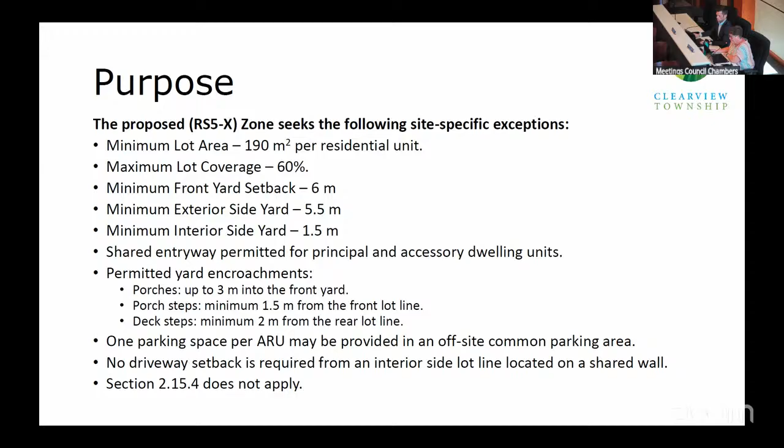Section 2.15.4 does not apply. The effect of the application is to facilitate a concurrent draft plan of subdivision red line revision application, which seeks to reconfigure a portion of the existing draft plan of subdivision.

This would include: 8 townhouse blocks consisting of a total of 54 freehold condominium units, including 35 units with accessory residential units, or ARUs; a common parking block for the ARUs parking area; a new school block shared with the development to the north; and minor changes to the existing lot fabric of the 26 single detached dwelling lots.

The next slides just show the surrounding land uses. The subject lands are shown in the bolded black line. To the north is an existing draft plan residential subdivision, the Clearview Park draft plan. To the east is County Road 7 and agricultural lands. To the south is Highway 26 and the emergency hub building, as well as residential and commercial uses. To the west is Mowat Street North and residential lands. The land subject to the current zoning application is located within the undeveloped portion of the existing Estates of Clearview draft plan of subdivision.

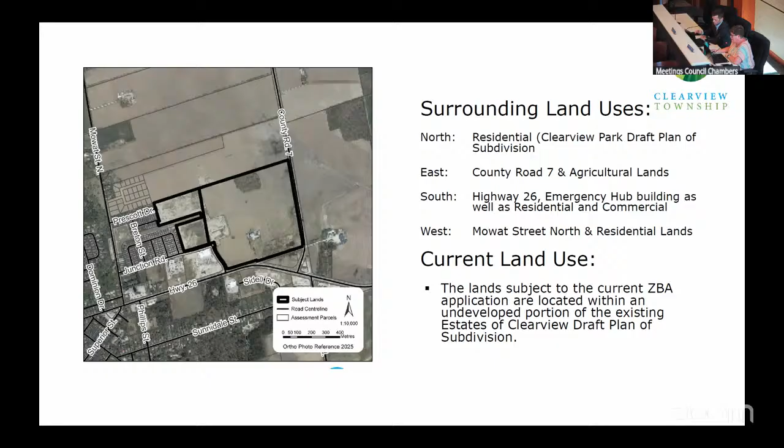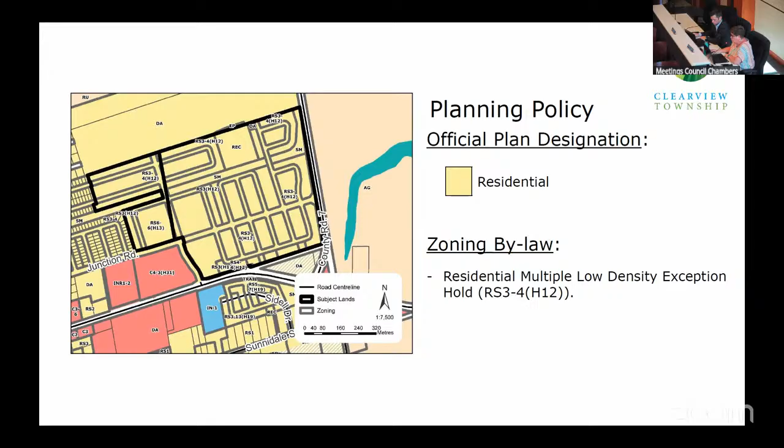Next slide, planning policy. The official plan designation is residential, and the current zoning is Residential Multiple Low Density exception hold, RS3-4, hold 12.

Submission items to support the application included a cover letter, a planning justification report, a draft plan of subdivision redlined, a site servicing concept, a servicing and stormwater management memorandum, redline draft plan, and the redline draft plan transportation review. All of these items have been located on the website for public and anyone to review.

Next slide, notice and circulation. Notice of the subject application was given in accordance with the Planning Act on July 8th, 2026, through mailing and circulating paper notice within 120 meters of the subject lands, as well as posting signage on the property. Details of this application and supporting materials have been made available to the public on the website and circulated to the relevant commenting agencies.

As for public comments, if comments have been received, they were part of the published agenda, and any other comments received after the publishing of this agenda will be included as part of our recommendation report.

Looking at where we are in the process: the applications were received on June 1st of 2026, and deemed complete June 12th of 2026. Notice of the public meeting was given July 8th of 2026. We're here at the public meeting now. There are two other steps remaining, a recommendation report and a notice of decision, which are to be determined at this time.

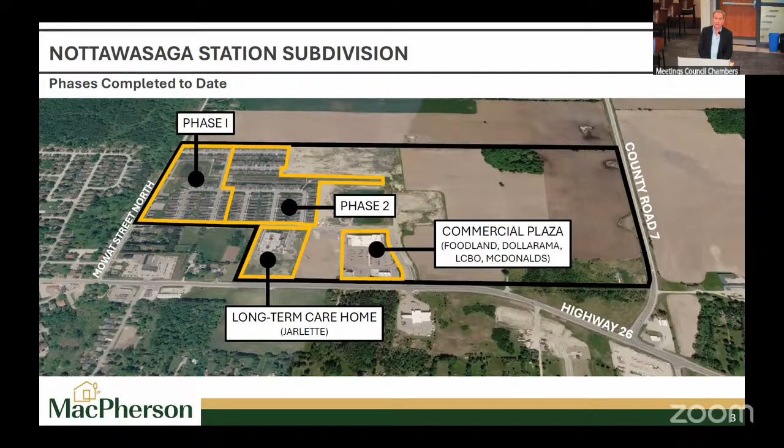Next slide, please. So just to orient you again, the yellow line is our original land holding, and as you saw from the other maps, we've developed about 200 homes on the west side of the site, single-family homes, the Jarlette site which is a long-term care facility, and the new plaza. So phase 1 was about 75 single-family units, phase 2 had 119 single-family units, and Jarlette built their site on our lands, and then we developed the commercial plaza with the Foodland, Dollarama, LCBO, and McDonald's.

Next slide. I'm sure nobody noticed, we recently put traffic lights in out on Highway 26. I proudly used the left turn signal to the arrow going in, grabbed something at McDonald's on the way over here. So those are finally up and running, and everyone's using it as an access.

The works on Mowat Street North have just been started. That's blocked off right now, I went and had a look before I came over. Those are now going to move apace to get at least the northerly 2/3, 3/4 of Mowat Street there brought up to an urban standard. Probably take us the next 3 months, so probably August, September - I think we have an October completion date. So we'll have curbs, sidewalks, asphalt, the whole bit in there, and clean up that part of Mowat Street. Next slide, please.

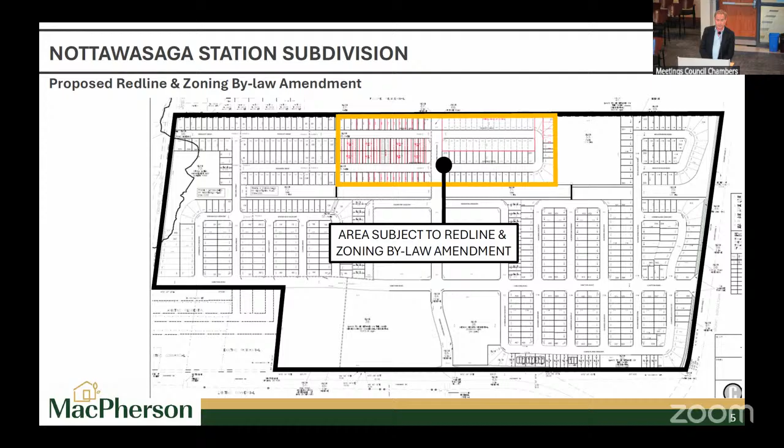This is the area subject of the bylaw, and I'll move to the next slide which gives more detail. This portion shows where the changes are. I'll start on the right-hand side, the school block site. As many members of council and staff are aware, we've been talking to the Public School Board for years, 7-8 years, about locating a new elementary school in the Nottawasaga Station subdivision and adjacent to it. After a lot of back and forth and movement of the block, we finally came into an agreement with the Public School Board on this location.

What you see there is a block of about 1.85 hectares, which is 4.5 acres in my language. There's an additional 1.5 acres plus, I believe, to the north, contiguous to this block. So the entire site is a little over 6 acres. 3/4 of it is on our site, and the remaining quarter is on the landowner to the north's site. What we have here is you can see the underlying lot fabric that we originally had there.

The zoning we've asked for would permit both uses. It would allow the school site, but also maintain the zoning, the ability for the single-family lots. The reason for that is in the event the school board never steps up to buy the site, or has a change of plans or wants to put it somewhere else, it'll allow us to finish this off and build those lots. That is not our hope - we'd like to have the school there. In the case the school is built, you'll have that new configuration of the roads on the right half there.

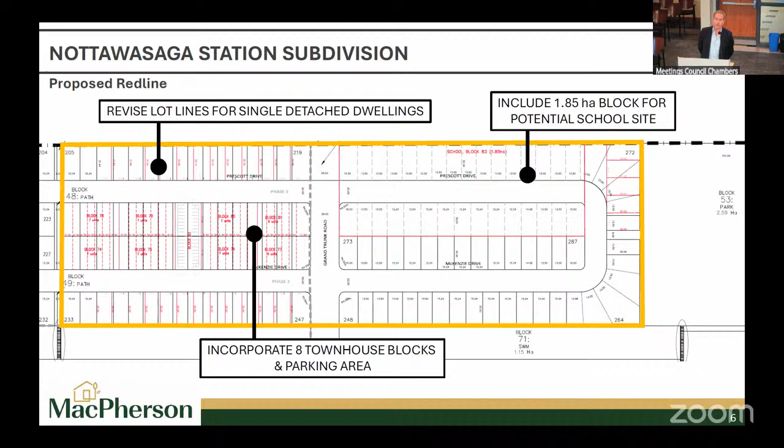And the interesting piece here is the piece in the middle. So if I could go to the next slide. No, not that - that's just a picture of the areas being rezoned. No, sorry, we'll just keep going. One more and one more. And that's been covered by Rosalind, so we'll go here.

So this is the meat of what we're trying to do. I'll explain a bit of the economics on the site and what's happened over the last 4 or 5 years. Through the pandemic, obviously, everything was selling like hotcakes - we had single-family homes in our first 2 phases. After the market topped out in April of '22, the market, as everyone knows, has declined. Prices are down in this area, in this subdivision, about 30% from the peak prices, the peak being April of '22. So a house that would have sold for $950 back at the top of the pandemic is selling for in the low 7s now on the resale market, the ones that our purchasers have chosen to bring to the market.

As a result of what's going on in the economy, all the uncertainty in the world, the rise in interest rates, and the general decline in demand because of a lack of a pandemic, people are finding it difficult to afford homes. We're finding this not just in Stayner and Clearview Township, but across the board. We're building in St. Thomas and other areas too, and it's the exact same story everywhere. People are trying to get down to a price point where they can afford to buy real estate.

In addition, there's an affordability issue for working people's houses. For example, the people who would work in the long-term care center, the McDonald's, the Foodland, it's difficult to achieve even a $700,000 house. It's a lot of money.

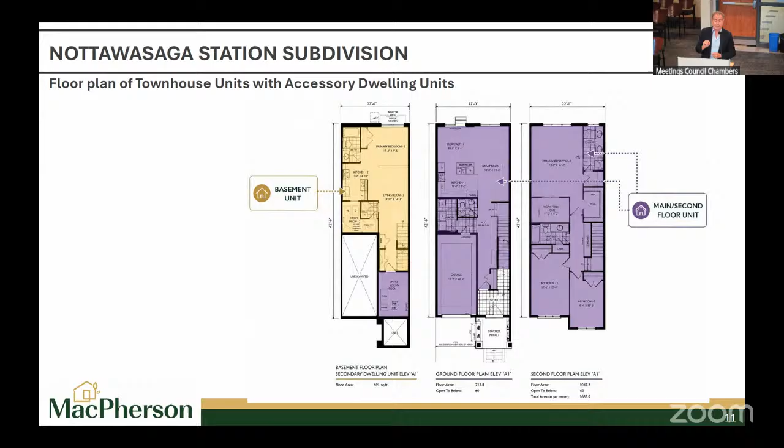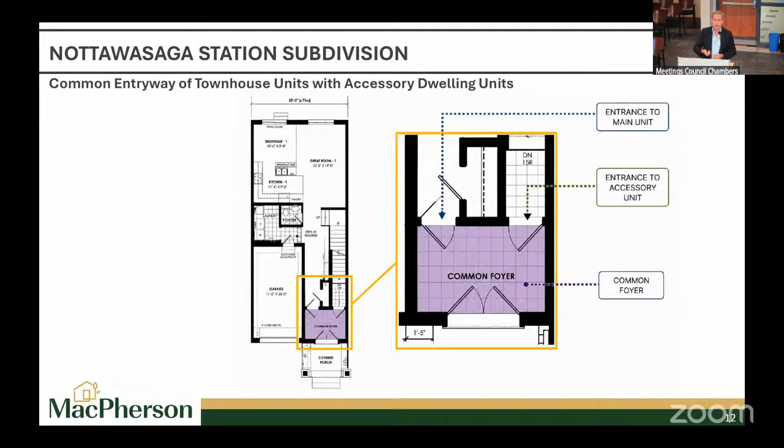So if we could go to the next slide—this is how it works. On the right you see the foyer as you walk into the house, a common foyer right at the front. On the right-hand side there's a door with a landing behind it that goes down the stairs into the ADU. The door on the left-hand side goes into the ground floor of the main unit, and then you're in your house, your main unit. Fairly straightforward. Next slide, please.

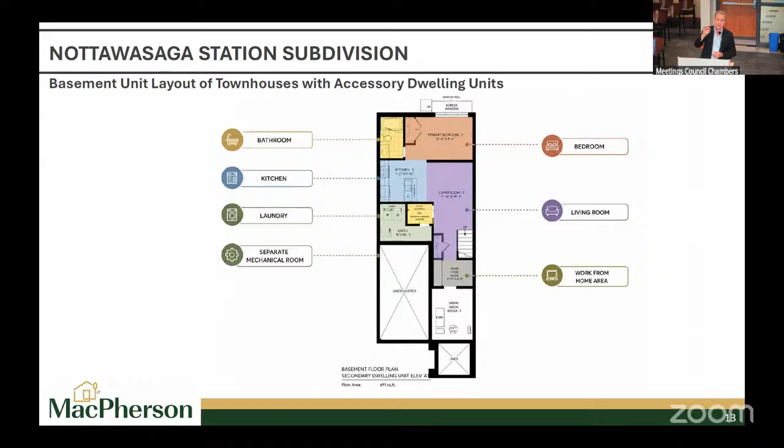So they're completely separated HVAC systems for the two units. They'll be separately metered, both units, and it provides an enclosed living space. You get to the unit by the little white piece on the right-hand side in the middle - that's your staircase coming down into the unit. Next slide please, and that's basically it.

It's an attempt we're making across the board, across the province, to bring in less expensive housing in the form of townhouses, but also bring in rental worker housing in the forms of the ADUs. Our guess, we don't know, but our guess is the ADUs will probably rent between $1,000 and $1,200 a month. The market will decide, or as I said before, it could be used as an in-law or a suite for another relative.

And the upstairs, it does a few things for the upstairs dweller, the person who owns the unit. It increases affordability by giving them a rental stream. The chartered banks will count up to 75% of the income from the basement towards your mortgage test. So it actually helps you qualify for your mortgage for the unit. So you've got an income coming in, but it also helps you qualify in the first case for the mortgage. And we're looking forward very much to building these here.

As I say, we've started building them in St. Thomas. We've had a great response to them, and we think it's not the only solution. It's not the silver bullet to fix all the housing problems we have in the province, but it's a piece of it, we think. And it'll cater to certain types of people in certain income levels who otherwise might not be able to access the market. So that's all my presentation, but I'm happy to answer any questions that council or staff might have.

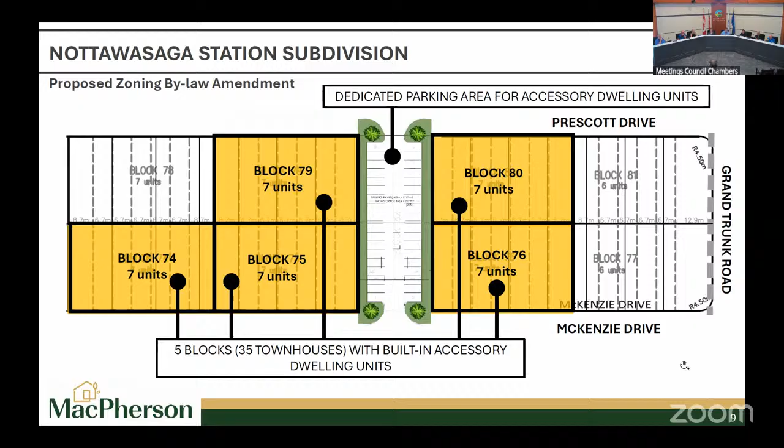It's new to us, and I think that this is going to be perhaps seen more in the future too. So congratulations on bringing it forward. I look forward to the report from our staff, and thank you for answering the questions. My pleasure. Thank you.

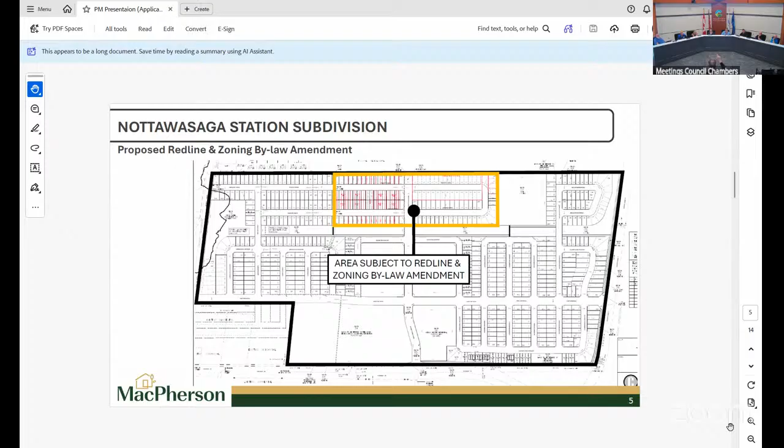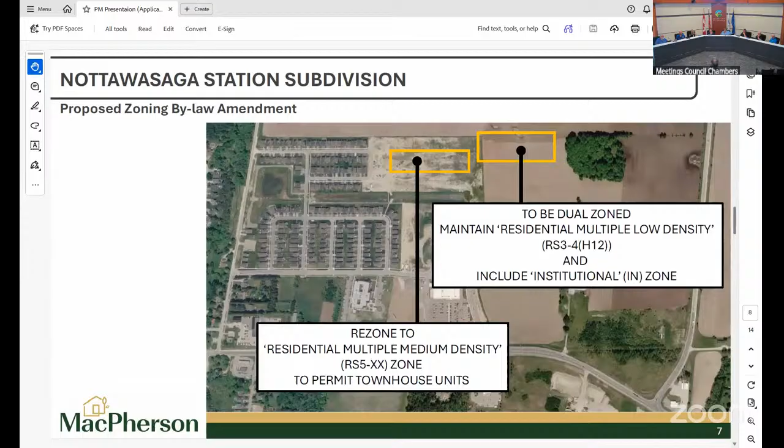Councillor Walker, did you have words of wisdom? Yeah, just making sure your windows are large enough for a fully mature individual like myself, and not like some of the smaller ones that are out there in the world.

The other question I have is I'm a little concerned with regards to the entrance to the mechanical room. If I'm the owner, is that going to create a problem for me if I have to get down into my mechanical room and I have to go through somebody else's apartment? That was just my concern about that, that's all.

Yeah, we have talked about that. Obviously, it's best to put the mechanical rooms and the furnace and everything in the basement. Because they own the unit and the renter will be a tenant of theirs, they'll have a key to the tenant's unit. They'll put in their lease that we're able to come down at reasonable times or any time in a point of emergency. Hopefully they'll knock first and head down. But there's really nowhere else to put the mechanical room, you've got a furnace and all that, and it's the right place to put it.

Just concerned that, because you've got a mechanical room, you've got filters and other things to look after and change in your furnace on a regular basis. If it's a family member, it's not near as bad, but if it's not, then you're infringing on somebody's rights in somebody's building. So I'm just concerned about that entranceway, that's all.